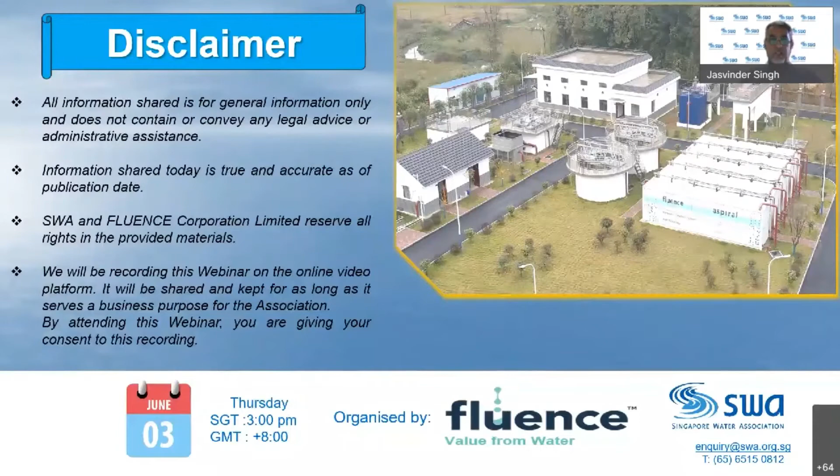We can't hear you, Carol. Yeah, okay, okay good. Thank you, Jess.

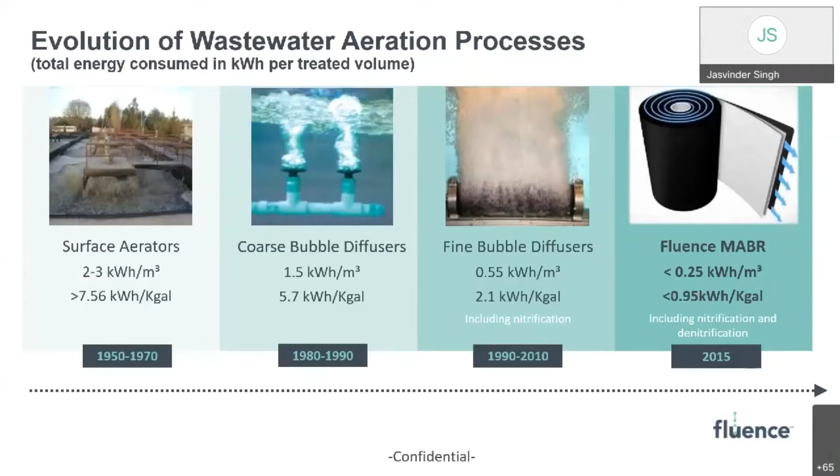But the real benefits of MABR are much wider, and we'll see that in the next few slides.

Fluence's MABR is unique in its simple design. We use flat sheet membranes with a simple plastic-based water and air spacer. Both provide structural strength and optimize air and oxygen mass transfer to the biofilm. You can see the structure here: it's basically a double layered membrane sheet with a simple plastic net air spacer, providing optimal conditions for air transfer through the membrane sheet. On both sides you have a water spacer, enabling water and mass to flow through the membrane spiral and contact the biofilm. That simple concept is inside our membrane technology.

The biofilm thickness, a question we get frequently, is actually very well controlled because we intermittently mix the module with a simple coarse bubble diffuser array situated under the modules. It's very simple, non-clogging, non-maintenance, giving a gentle shake to the biofilm and sloughing off most of the excess biofilm. What we've observed in some of our installations is an increase in the nitrifier fraction of the wastewater. I'll explain that.

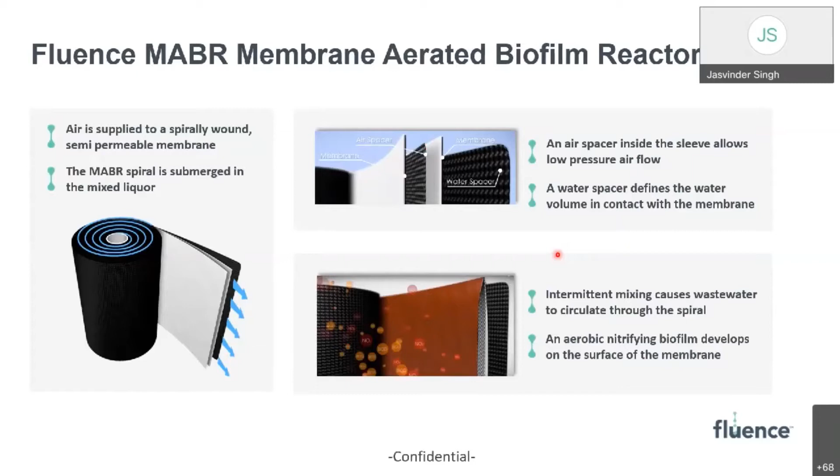A little more inside the process, and I'll start explaining how this really works. On the left side you have the air side, the inner part of the membrane, and on the right side you have the wastewater side, the water side, with the biofilm in this gray drawing. Oxygen diffuses from the left side to the right side, and in this case ammonia diffuses from the wastewater to the inner part of the biofilm.

Nitrification happens and nitrate is produced as a result. That nitrate diffuses out of the biofilm because that's the natural flow of nitrate. It's a much larger molecule than oxygen, so it can't diffuse back into the membrane layer. So it diffuses out to the bulk wastewater, and in the presence of BOD, of carbon source, it is immediately denitrified into nitrogen gas, and that's how you get simultaneous nitrification and denitrification, two distinct ORP conditions in the same basin.

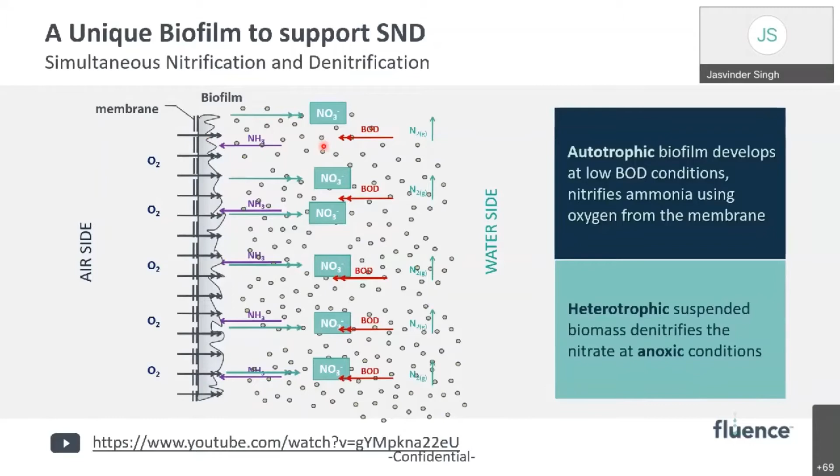And I'll explain about the ORP, the oxidation reduction potential. You have very high aerobic ORP at the very base of the biofilm because you have an unlimited supply of oxygen. As you gradually go out from the biofilm to the bulk wastewater, the ORP decreases, and it's somewhat slightly negative, as we'll see in graphs later. In the first MABR stages, it's almost anaerobic. So both of those support a denitrifying process that happens in the absence of oxygen.

So now we're going to go even deeper into the process, and this is the last deep dive that we have.

Traditional biofilm processes such as RBCs, MBBRs, IFAS, any other biofilm technology out there, which were considered revolutionary 20 years ago, have a very specific diffusion mechanism, and actually that mechanism is true for almost any type of existing wastewater treatment. It's called co-diffusion, meaning that both dissolved oxygen, the electron acceptor, and BOD or ammonia, the electron donor, come from the same direction, from the bulk liquid, and they reduce together as you advance into the biofilm itself.

So the left side is the bulk wastewater, the right side is the base of the biofilm, and the biofilm thickness is on the x-axis. You see they both decrease rapidly when you enter the biofilm, and pretty much at the middle of this x-axis, you can see very low dissolved oxygen and BOD concentrations.

And as we all know, when we model processes with kinetics, Monod kinetics, this dictates a very, very slow reaction rate. As a matter of fact, this area, the base of biofilms in MBBR, RBCs, or whichever other biofilm process, is considered a dead biofilm, a non-functional biofilm, and only acts as a sort of support.

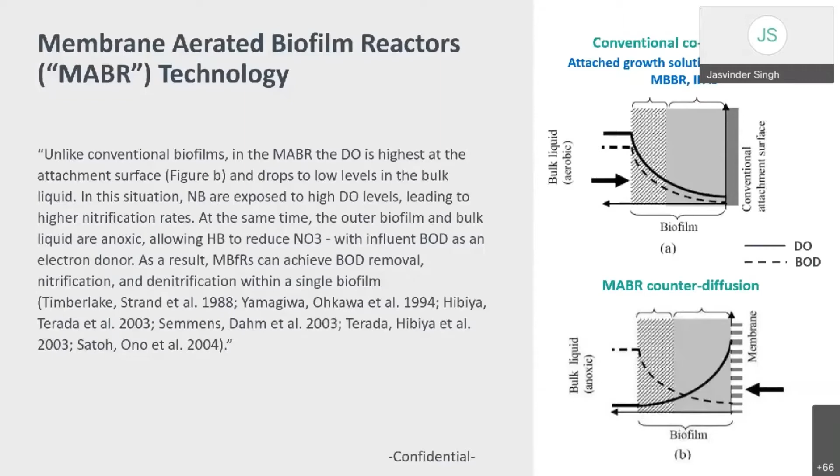So after discussing the differences between MABR's biofilm and other biofilm processes, let's talk about the membrane. Usually when people first hear about MABR, they think it's a filtration process like MBR. I spent around 30 minutes on a webinar explaining the difference between MABR and MBR, but actually it's completely different. The membrane in MABR is only there to act as a means of oxygen transfer and biofilm support, as opposed to MBR processes where you actually filter the sewage through the membrane and leave all the solids on one side. That inherent difference between membrane filtration and membrane biofilm processes is what causes the membrane lifetime of MABR to be much longer than membrane filtration processes.

We talk about a 20-year lifetime expectancy, and we guarantee 15 years on all of our products. This is as opposed to 3 to 7 years in MBR processes, after which you have to replace the MBR membranes.

Another important point is that there is absolutely no CIP, scouring, extensive chemical cleaning, or biofouling recovery cleaning associated with MABR processes. We like to say that we love them as dirty as possible.

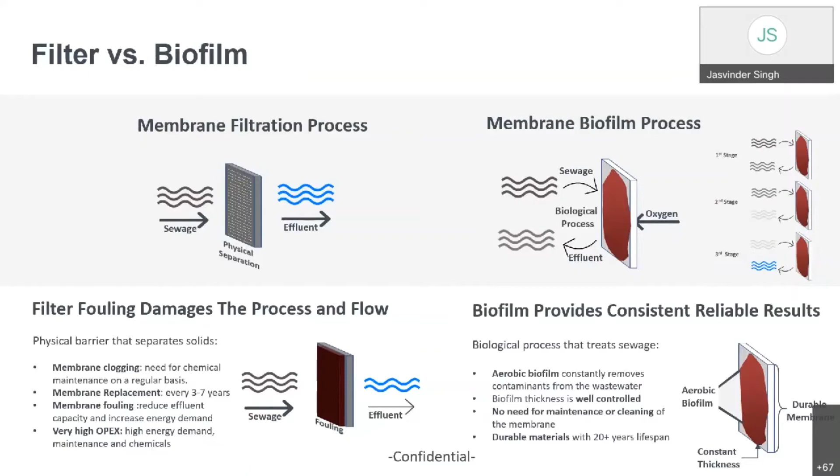Membrane biofilm processes - that's a very, very important point to point out. And if you keep that in mind together with the difference between counter-diffusion and co-diffusion, you can really understand the value proposition of MABR properly. So going forward to a qualitative comparison between technologies, here's a little table to summarize.

Starting with A2O processes - anaerobic, anoxic, oxic processes. A large amount of wastewater treatment plants worldwide operate as A2O, conventional activated sludge. So A2O processes, if operated properly, can provide a good effluent quality, but they are energy intensive and prone to SRT nitrifier washout sometimes due to storms. Nitrification-denitrification is generally a tough process to control in low temperatures or with a lack of carbonaceous material.

And all of what I just mentioned leads to complex process control, which requires you to have a skilled operator and a good crew. Sometimes even a good crew doesn't help you in cases where there's an SRT washout or some sort of problem in the process, and then you have to start up the plant - it's a very, very long time to recover from an incident like that.

So MABR can easily fit into A2O plants, into the anoxic zone, which I'll show in one or two more slides. And actually, you are saving on energy, improving total nitrogen and total phosphorus removal, and canceling any internal nitrate recirculation that you have from the aerobic to the anoxic basin. In general, you're simplifying the plant's operation.

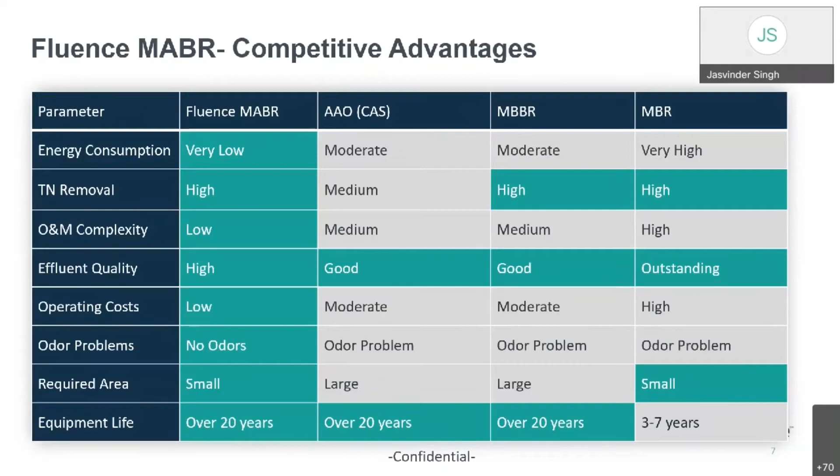Just an example, A2O: we have a plant in Israel called the Maayan Tzvi wastewater treatment plant, where we upgraded our first line some year and a half ago and added 20% nitrification capacity to that treatment line with only 2.2 kilowatts of installed power. That's a significant advantage to A2O. This is the Maayan Tzvi plant I'm speaking about.

We're now entering the second upgrade stage. The basins had actually been treated for nearly 10 years, so the installation process included basin cleaning, other works, installing new diffusers in the aerobic area, and upgrades. This was a very large project for Fluence at the time.

Overall, we installed 11 Aspiral MABR modules inside the existing anoxic area of this basin, the left basin. Currently that MABR line is treating between 67 to 75% of the total influent, while adding 20% more nitrification capacity to the plant. This is probably our best example of a successful A2O plant upgrade with MABR, and you can see that we're consistently exceeding the effluent quality.

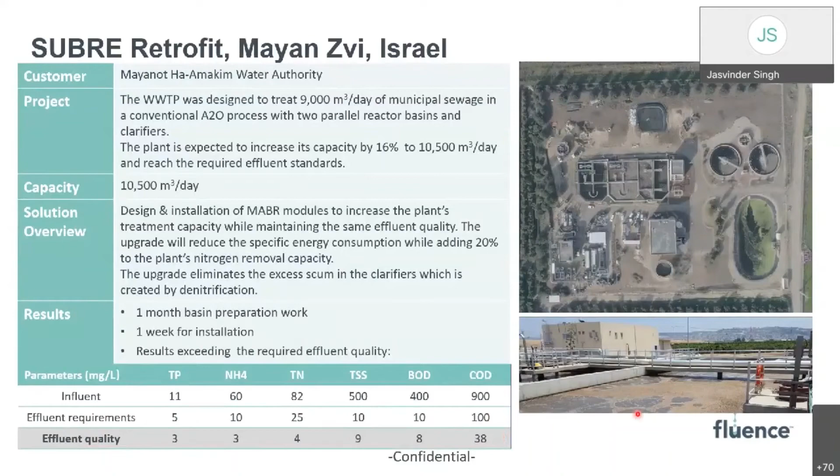Moving to a completely different scale and application, we partnered with a great company called Orenco, great friends, great people, in the northwestern US. Orenco is an FRP tank manufacturer, also a very successful small wastewater treatment plant manufacturer. We partnered together on this project to supply an MABR-based system for an RV park, a recreational vehicle park, in Oregon. This project was unique in many ways: the location, the application, and also the process scheme.

Fluence supplied our MABR modules in this case, and our partner Orenco supplied a fifth chamber with MBBR carriers. What the MABR process does here is reduce the total nitrogen to a level where the MBBR only needs to do aerobic polishing. As we know, biofilm-based systems, aerobic biofilm-based systems, are very rapid at removing BOD.

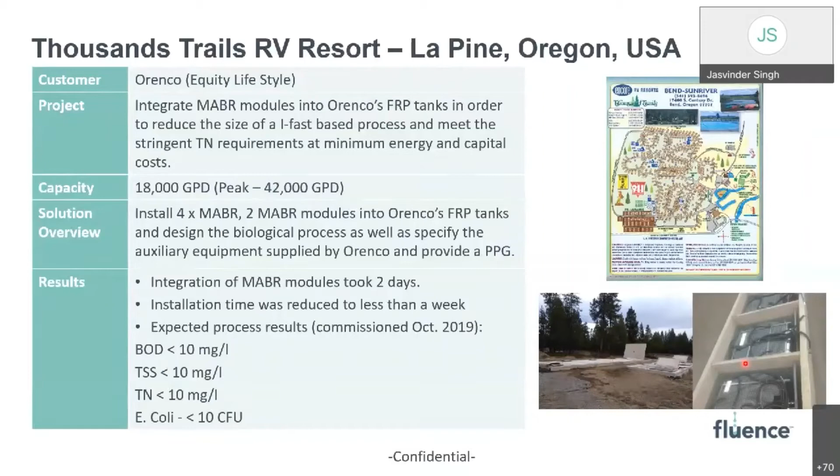So we are able to treat a 42,000 GPD flow with this single unit: 4 MABR modules and one small MBBR chamber. We're able to meet a very low total nitrogen requirement for discharge to the environment—this is a direct discharge to the environment. All in all, we see a very successful partnership between MABR and MBBR in this case.

Lastly, MBR, which I touched on for its high energy consumption—but in areas where very high effluent quality is required, for instance for non-potable reuse, we have a unique product that utilizes MABR and MBR in one product. We call this the Aspiral UF. This is an MABR-MBR process, taking the best of each technology. You see outstanding effluent results in this table: ammonia under 1, extremely low turbidity, and very, very good parameters that can lead to potential reuse.

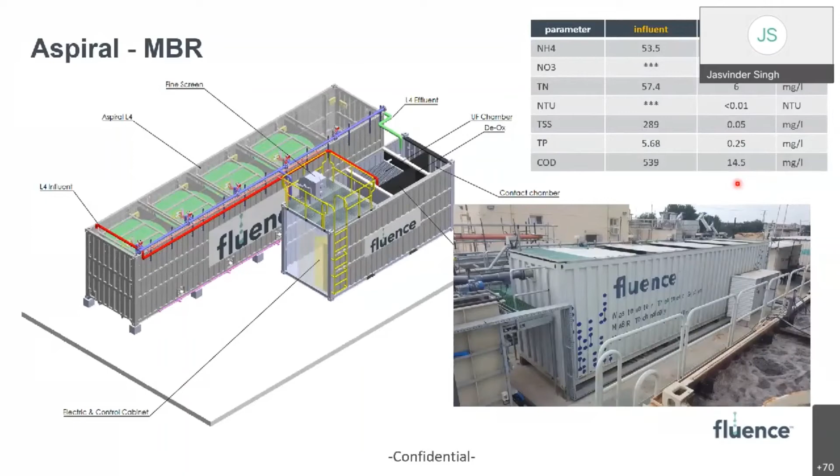This has been installed in several locations in America, and there are a few more systems being prepared for projects. So to sum up the comparison, MABR has several inherent advantages due to the process and the diffusion method to the biofilm. Otherwise, it can be combined with other technologies in order to maximize treatment efficiency and get the best out of each technology, which you've seen in the past three slides.

Going back to the MABR technology, I want to point out that MABR is indeed a very new technology in the wastewater treatment world, but it's been validated and proven in over 150 physical installations and over 260 ongoing projects throughout the world—and that's only Fluence. This number isn't typical for a technology-based solution that's celebrating only 5 years this year, especially in our industry, where innovation takes a very long time to materialize and commercialize.

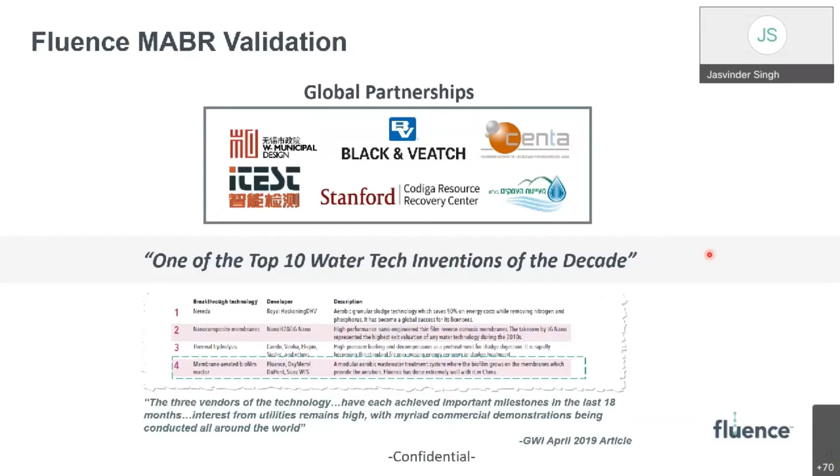Our technology was validated for Title 22 reuse in the US. It's licensed in multiple states, validated in China, in the Philippines, and other regions. We work closely with Black & Veatch on multiple projects, and they're actually validating our installation in Mayan Zvi in Israel. This is the reason that, back in 2019, MABR was chosen as one of the top 10 water tech inventions of the decade by GWI.

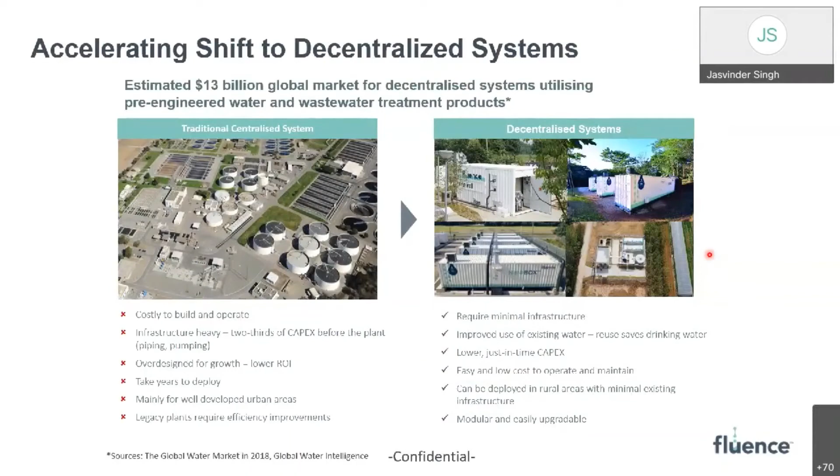So a comment about decentralized systems. You all know that Fluence believes and aims for the decentralized market, and decentralized solutions hold multiple advantages. We already went over them in the last presentation, but I want to point out that Fluence has a wide range of decentralized applications, and we can go both directions if needed.

I'm going to present a semi-centralized application in a moment. It's considered a small-scale centralized plant, but you can see that MABR can be considered for projects even if they're concrete-based or centralized, just to point out that Fluence doesn't only supply MABR in 40-foot containers. So the degree of decentralization here rises as you go from centralized upgrades or new plants to our smallest member of the family, the Aspiral Micro.

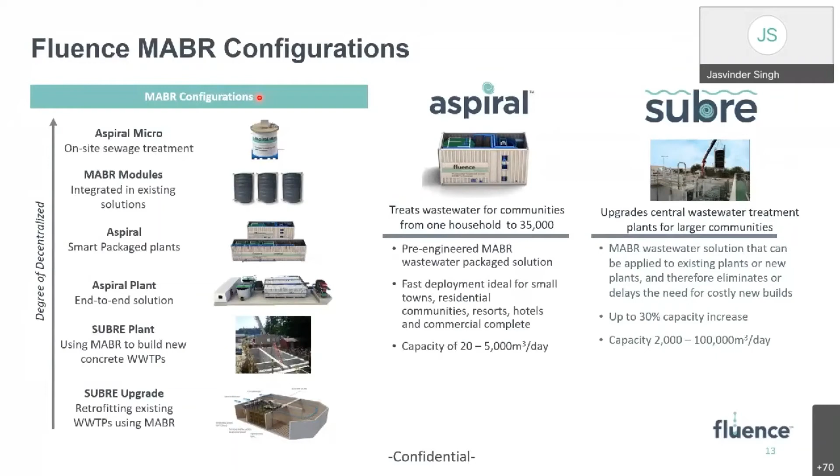Okay, this is our product portfolio, presented here in a more thorough view. Starting from the Aspiral Micro, a single home unit, through package plants, 40-foot and 20-foot package plant containers, building blocks to form a large wastewater treatment plant. We can go up to 5,000 cubic meters per day with containerized-based solutions. Modules, standalone modules that can be supplied to manufacturers, as we've seen in Oregon.

And the two larger applications, SUBRE plants and SUBRE upgrades—in this case, Cambodia, which we're going to see in a moment, and Mayan Zvi, which you saw in Israel.

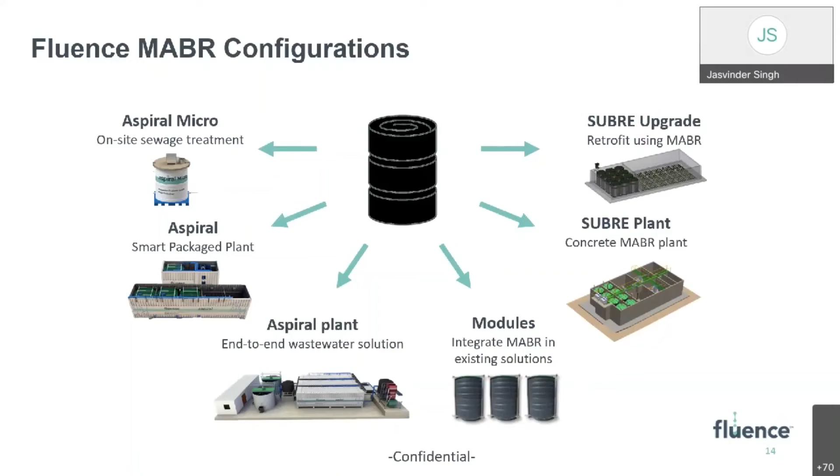So I'd like to discuss our most recent Subre plant, here on the right side. This plant has been commissioned just last week, and it's in Sihanoukville, Cambodia. It's a first of its kind plant in the region—not just the first MABR plant in the region, but the first biological treatment plant in the region.

Before this, the wastewater used to be discharged through an open trench, and now what we've successfully done is install a 7,200 cubic meter a day plant, which treats the wastewater to outstanding quality and enables it to be discharged directly to the sea, protecting the ocean, fish, and the environment in the area. If you remember the previous webinar with the 80% of global wastewater going out to the environment untreated, this is what I mean. This is what we are here for, and this is the real greatness of installing an MABR-based plant, which treats nutrients in a very efficient way.

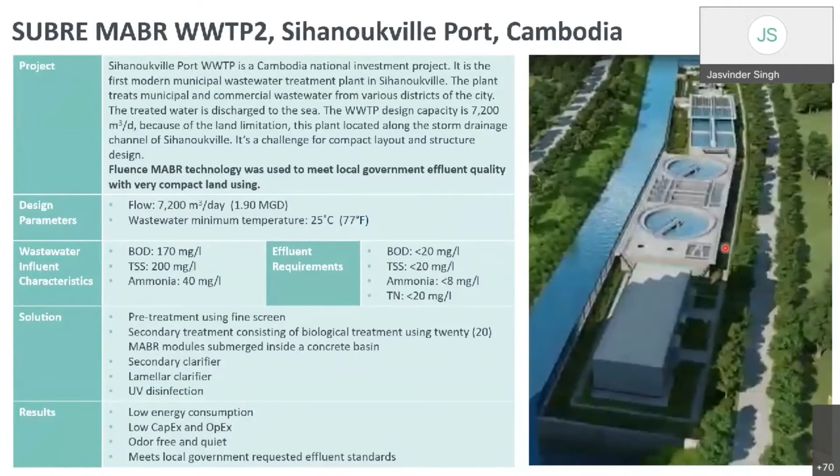And there's a short movie here to watch.

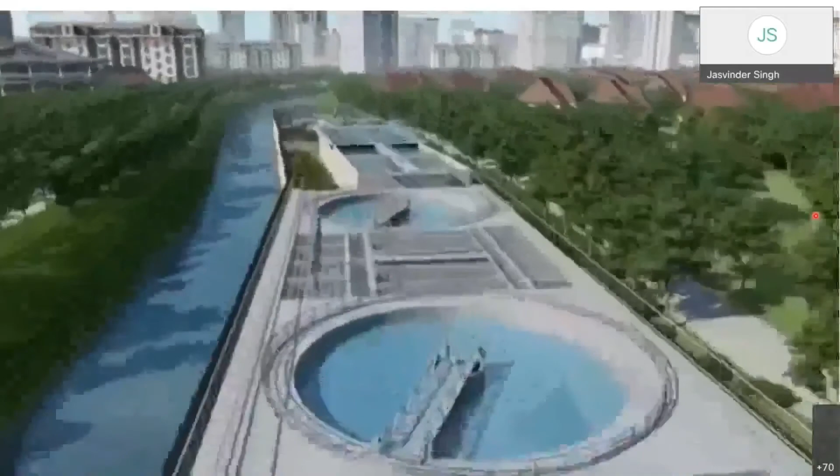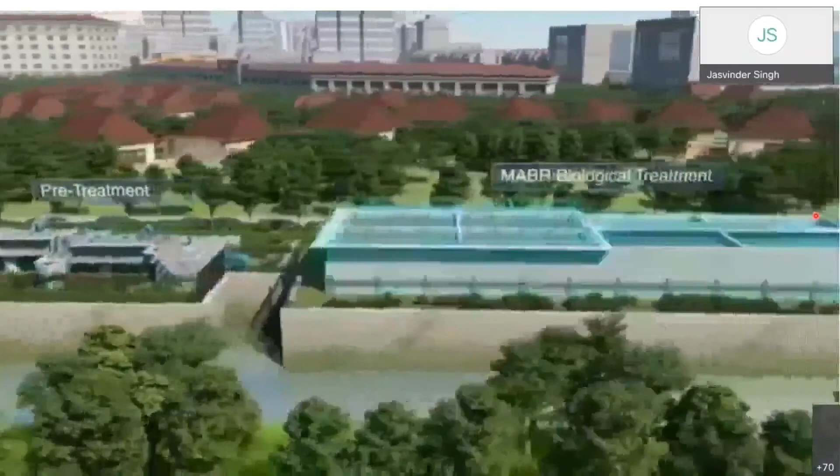Located along the coastline, Sihanoukville wastewater treatment plant, with the capacity to treat 7,200 cubic meters a day of domestic wastewater, is an important project led by the Cambodian government to protect the natural and living environment. The resulting effluent can be safely discharged back into the ocean without damaging the environment. The Sihanoukville wastewater treatment plant includes the innovative Israeli MABR biological treatment technology, in addition to pre-treatment and post-treatment, composed of the innovative membrane aerated biofilm reactor, MABR system, and a clarifier, which effectively removes organic compounds and nutrients containing nitrogen and phosphorus. Due to its unique method of passive aeration and treatment through biofilm, Fluence's MABR is a validated, stable, quiet, and environment-friendly technology for simple, effective, and energy-efficient nutrient removal.

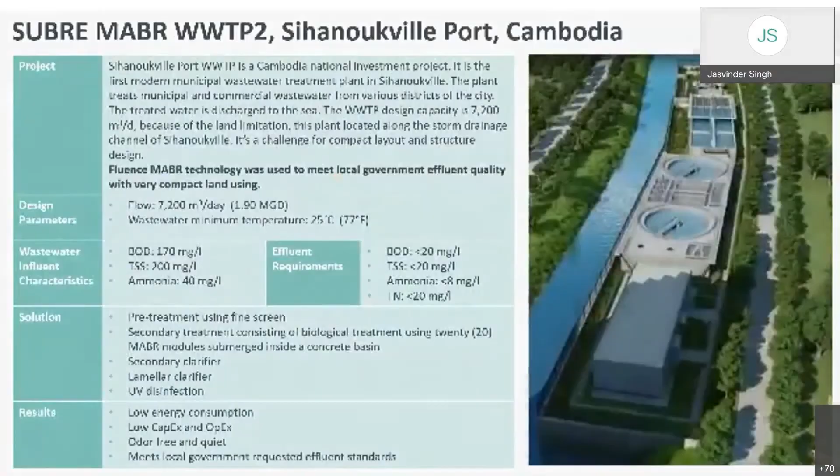Okay, so this is the plant that was commissioned last week. You can see the MABR basins, these four MABR basins, and—there we go—a total of 20 MABR supermodules. So this plant, as I said, has been commissioned last week and is a big promise to the aquatic environment in the area.

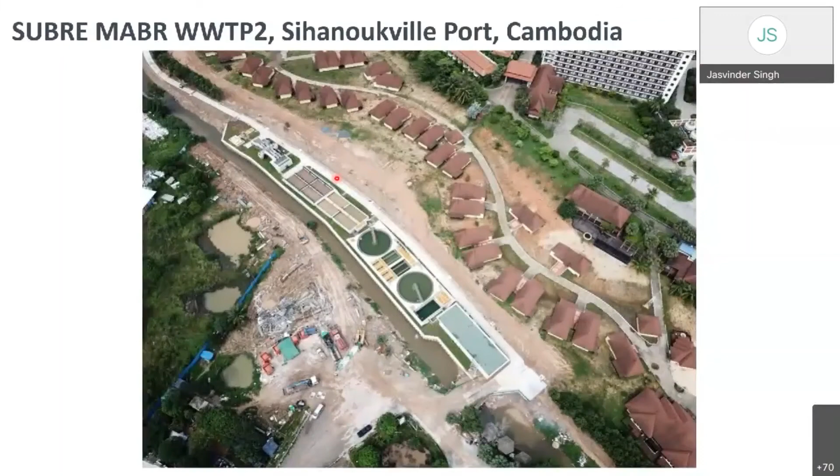What I'd like to do now is present a few more case studies of our systems throughout China. I have somewhat some 3 minutes, and then we'll go to questions.

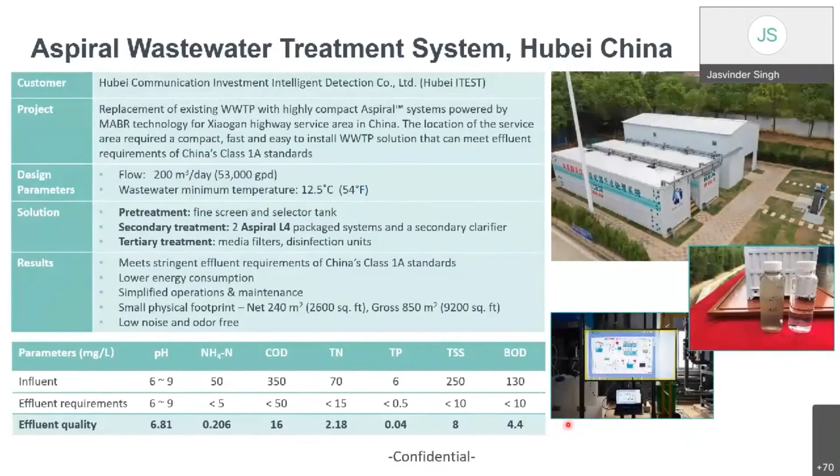So this was our first treatment system as part of a huge project in the Hubei region, partnering with iTest, which is a highway owner and operator. Each and every one of iTest's toll stations and stop stations has a Fluence MABR-based solution. This was an old wastewater treatment plant that we actually built a new containerized system on top of, utilizing the existing basins. You can see it's an outstanding effluent quality that's returned to the environment at the end of this process. I'll send you the presentation, so I won't go over all of the case studies now, but here's Sihanoukville again.

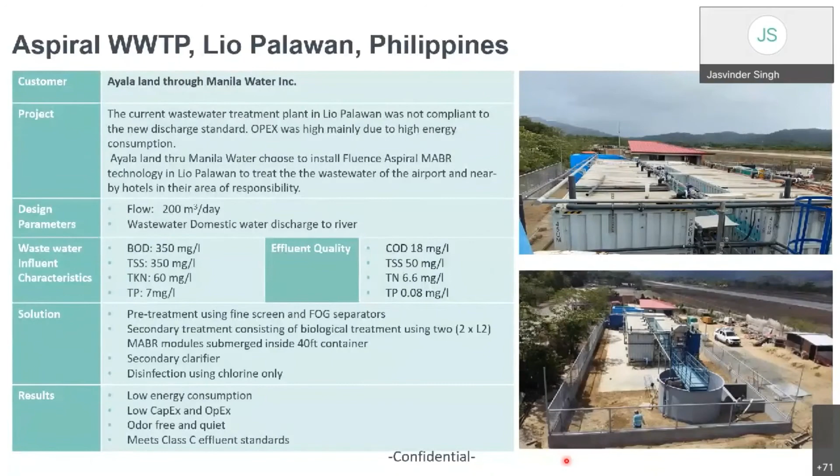I wanted to speak a little about our Philippines installations, which are starting to gain traction. There are 2 more concrete projects now happening in the Philippines, in the Manila area, and all in all, MABR is gaining big traction in the Philippines and is a validated technology, actually specified in tenders for wastewater treatment in the Philippines, because they understand the real need for nitrogen removal and are enforcing tight total nitrogen and ammonia regulations.

So all in all, MABR has over 260 installations worldwide. It's a validated technology, and it's probably your best choice for either upgrading an existing plant or installing a new decentralized plant. MABR is your choice for nutrient removal technology, and Fluence has the ability to supply high quality MABR-based solutions for those needs.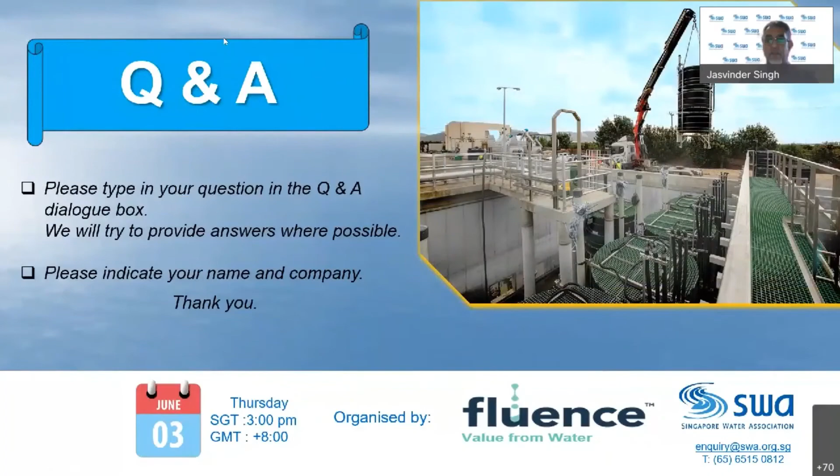We have a couple of questions there. Are you able to see the Q&A box? Yes, I can see both the Q&A and the chat. Okay, you click on what you want to start the Q&A with. Yeah, because some of the questions we have cut and pasted into the Q&A box, so that will be the complete questions there. So the first one, okay, let me stop sharing, and I'll just tell you what the questions are. The first one is from Jason Wong.

He asks, what kind of alpha factor is designed for the spiral wound aeration?

Yeah, I think technical questions, because it's a long answer, we'll take offline. Sure, I see we have a lot of technical related questions. We can answer all of them, but I think it'll be beneficial to tackle the more general, non-technical questions. Everyone will get an answer.